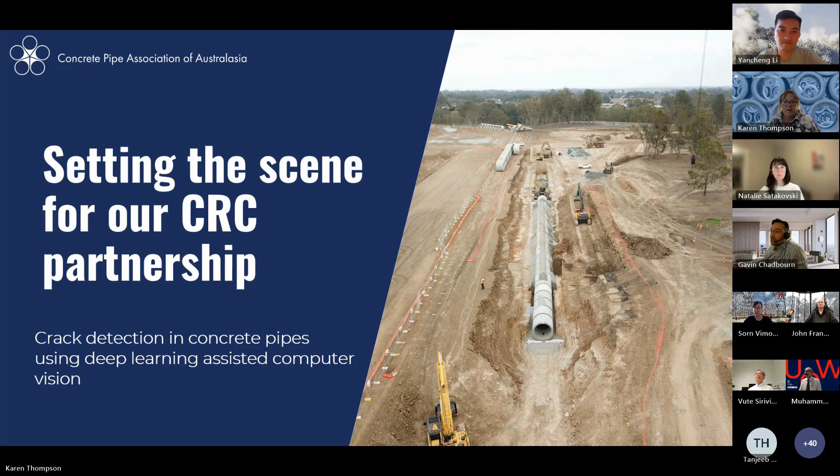So I guess what the challenge is, is that currently the industry relies very heavily on CCTV for the inspection of newly installed concrete drainage pipes and routine maintenance inspections as well. It's very widely used and it underpins most condition assessments. But the reality is the technology has a key limitation. It simply doesn't have the resolution needed to accurately measure fine cracks, particularly anything below 1 millimetre. And I'll explain to you soon why that matters.

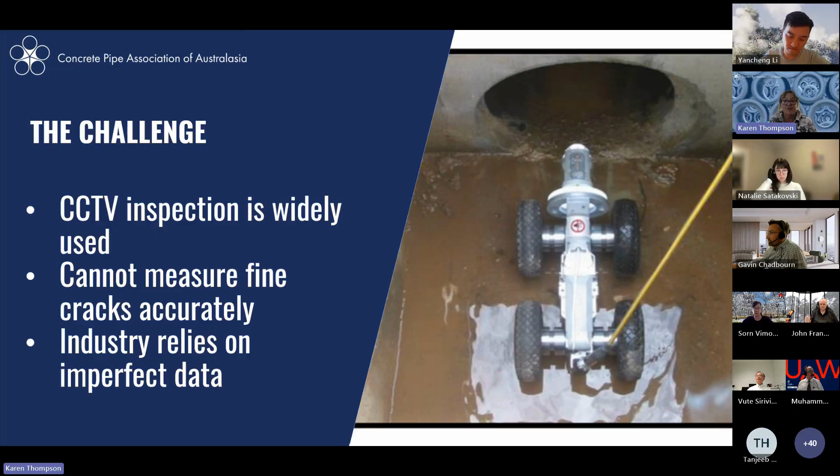CCTV operators identify defects such as cracks, and they estimate the crack width based on experience or past entries into software. Repair, maintenance and replacement decisions are made on this somewhat imperfect data. We're relying on a tool that isn't designed for the level of precision that is actually being reported. The consequence of the limitation is that the crack widths tend to be overestimated in practice.

The reporting can lead directly to decisions to line, repair, or even replace pipes that are still structurally sound and perfectly capable of performing as intended. From an installer's and an asset owner's perspective, this translates into unnecessary expenditure, disruption, and inefficient allocation of finances. It just isn't a technical issue, it has real financial and operational implications across the industry.

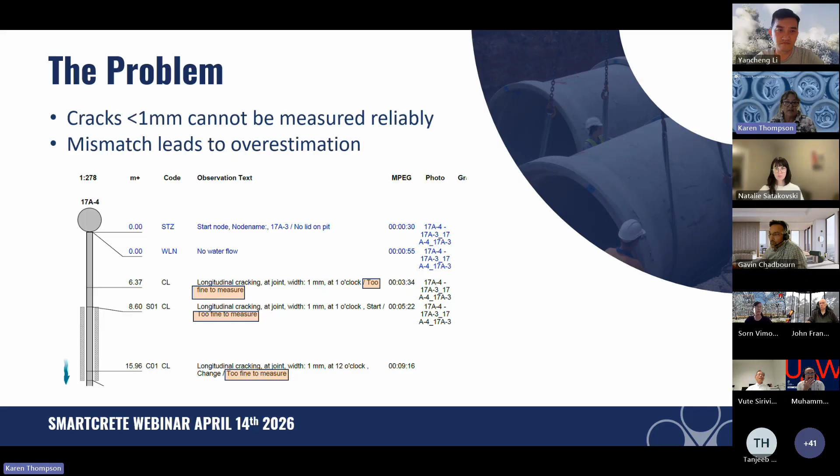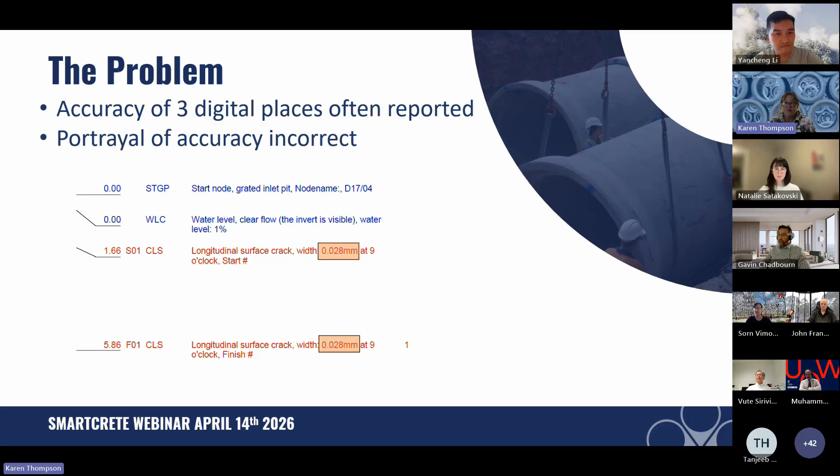Despite the lack of technical capability for CCTV cameras to measure crack width accurately below 1 millimetre, there's many incidences of CCTV reports stating crack width measurement down to the 3rd decimal place. Reporting cracks with widths to this accuracy portrays a level of accuracy for what is essentially an estimation of a crack width. A level of accuracy to 1,000th of a millimetre is simply not possible with current camera technology. Yet installation contractors are forced to either undertake remediation or spend time and money to undertake further analysis of such reported defects based on this misleading reporting.

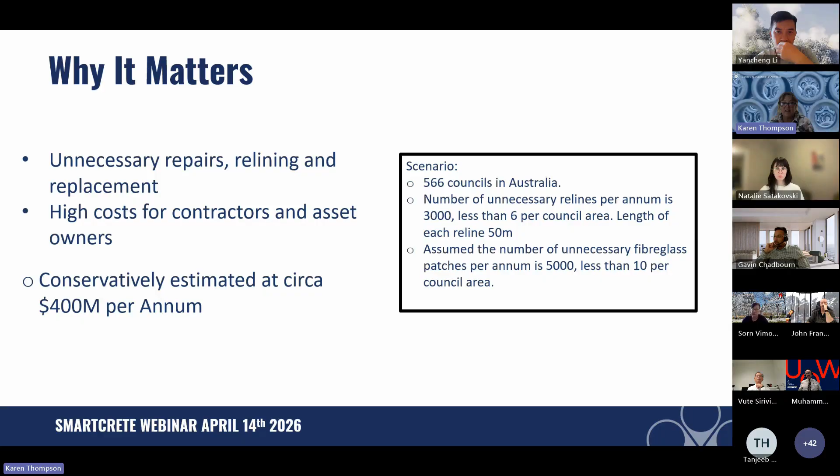I guess I've got to build the scenario of why it matters. It's a really high cost, and we estimate it conservatively to be around $400 million per year, based on building a scenario where there's 566 council areas in Australia, and we assume each council area on average has a number of relines and fiberglass patches done in localised sections of pipe.

So there's a lot at stake. We also have a gap in our standards.

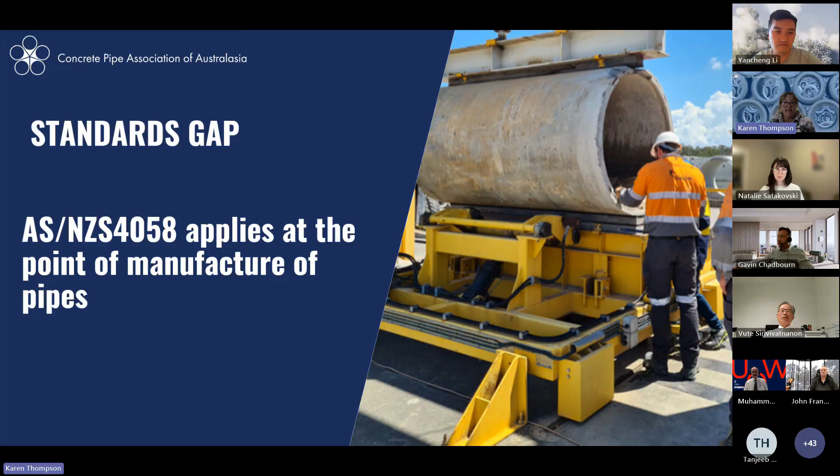The crack width nominated is simply a quality assurance performance indicator. It's not intended to be the maximum allowable crack width in the field, but it often gets adopted as such. The allowable crack width varies with increasing cover to steel. CCTV reports do not correlate cover to steel, nor do they include the design cover for the pipe, so what's normally assumed is that the lowest crack width applies to every pipe.

If the cover to steel is 20 mils, the 0.2 mil feeler gauge is used, and the tip must not penetrate a crack more than 3 mils deep. That's how we measure it.

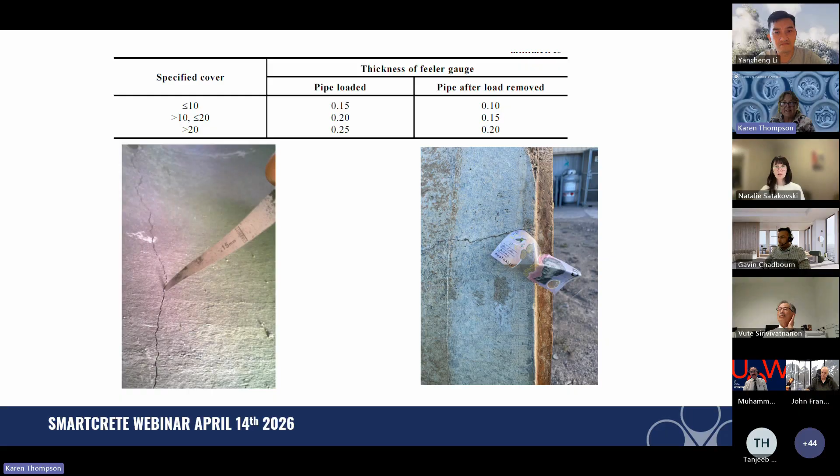Just to give you a sense of allowable crack width, a $5 note is, don't quote me, I think 0.126 millimetres, so less than 0.15. When we were doing some factory testing of old exhumed pipes, I tried to stick a $5 note into a crack and could only just get it in there, and this pipe was ultimately load tested.

But it gives you a sense of the size of allowable cracks. We're all familiar with hairline cracks—they're visible but not measurable. They're expected in all proof load tested concrete drainage pipes, and also expected in all installed concrete drainage pipes where the applied load approaches pipe design load.

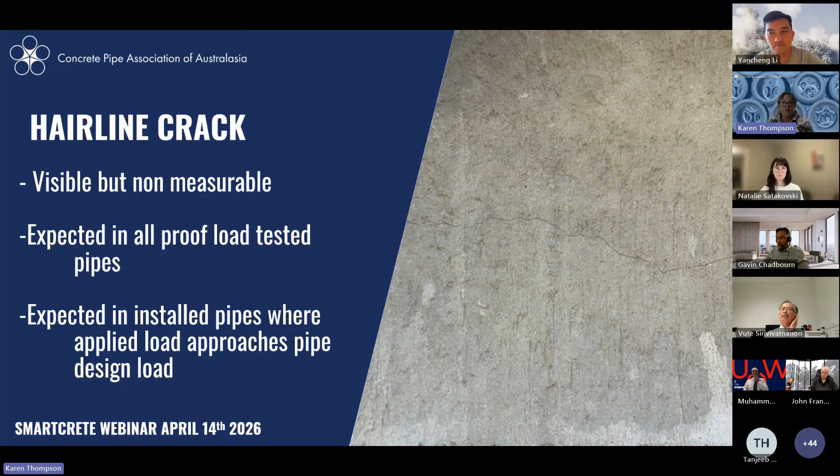There are specifications that do not allow the existence of hairline cracks in installed concrete pipe. They have a no-crack policy, which just doesn't make sense with a steel reinforced concrete structure. But these specifications make no steps to ensure that loads applied are less than what would see the steel doing its work and hairline cracking occurring.

So I think I'm trying to paint a little bit of a problem our industry has. The other thing is crack assessment can differ.

Crack assessment varies by the operator and what the operator sees, the camera that's utilised, the equipment, the distance the camera ends up being from the wall of the pipe, the level of zoom applied with the camera, and even cleaning—the spec says they have to clean the pipeline through pressure cleaning, the walls become very, very wet, and so every little hairline crack looks like a canyon.

You can see from these pictures, this is the same image, just with 3 different zooms. If you saw the top image, you'd say maybe there's this very, very small hairline crack. When you get down to the zoom on the bottom right, that looks like a disaster, and it would be pulled out. But the reality is the pipe has a very acceptable crack width. And that's just one of the issues we get from the CCTV reports.

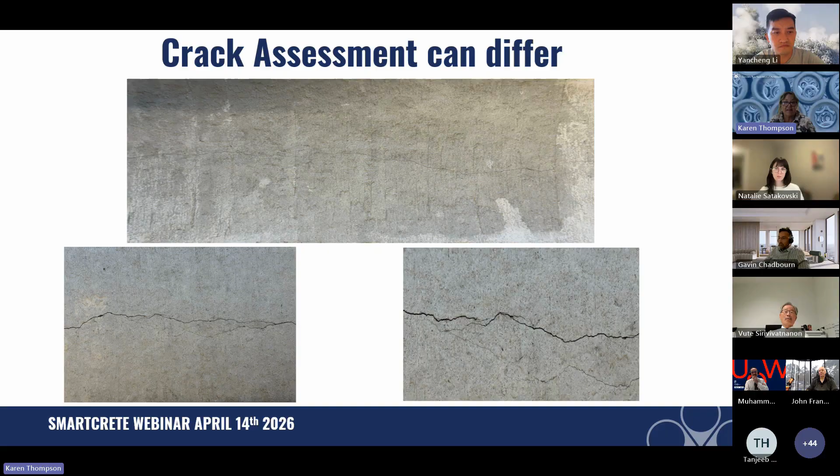So what we're hoping for is accurate field crack measurement being possible—that's our dream. And that's where Yancheng and his team at UTS offered up the idea that deep learning assisted computer vision could be a game-changing alternative to current CCTV monitoring of installed pipes.

Asset owners also need to have an improved understanding of the mechanism of cracking in concrete pipes. The crack initiation and propagation needs to be better understood, and how it differs from ordinary concrete due to the low water cement ratios in the product, the level of compaction utilised in the manufacturing process, and the very small diameter of steel incorporated compared to normal steel reinforced structures.

And the effect the pipe shape has on crack propagation, and the importance the underground environment has on the corrosion process. Not all cracks are what they're cracked up to be. So in steps Arnaud Castel and his research team at UTS, who are undeniably capable of researching the issue and providing data to better specify allowable performance in given environments.

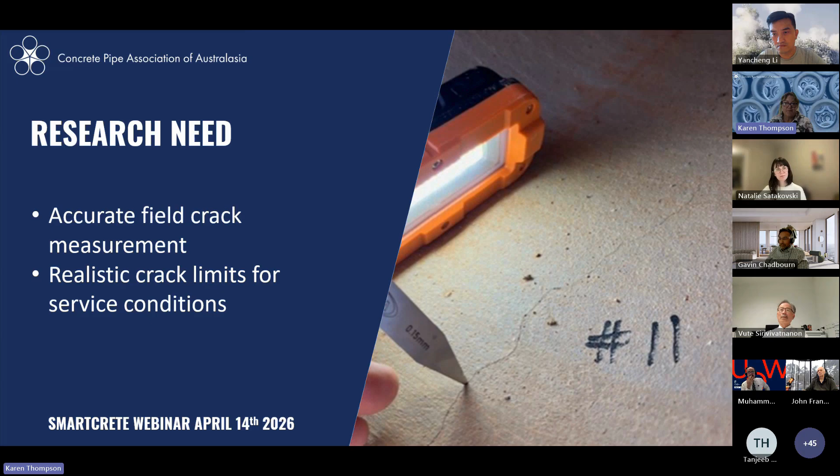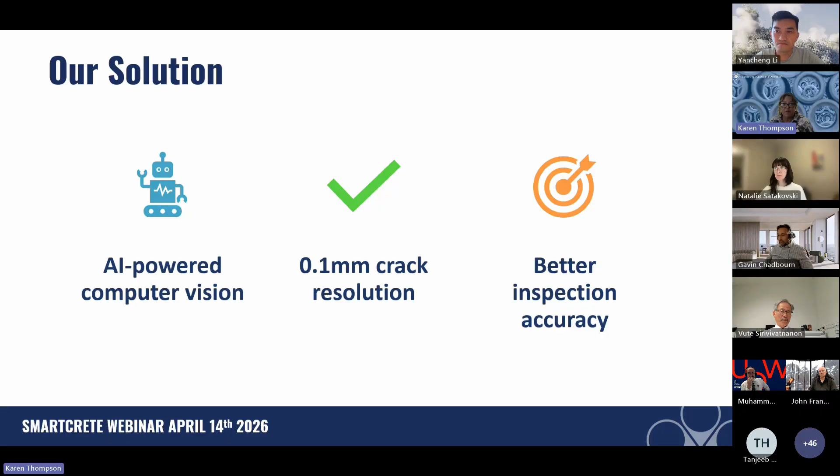So stream 1 of the research project is to develop a deep learning assisted computer vision as an alternative to current CCTV monitoring of recently installed and in-service pipes. The technology will be able to achieve 0.1 millimetre accuracy. We're not looking for that 1,000th of a millimetre that is currently reported, because that's not possible, but 0.1 will actually do the job immensely better. The development and commercialisation of equipment, process and inspection guidelines related to this new technology would provide the asset owner with appropriate data to make improved, informed assessments and reduce unnecessary costs in construction.

And then comes in the supporting research. Autogenous healing is an important phenomenon in installed concrete pipe. Autogenous concrete self-healing reduces the crack width or can totally seal the crack if the crack width is small enough. This project is investigating the relationship between crack width, self-healing process, and the corrosion of reinforcement of concrete pipes.

Other supporting research it's covering is that the corrosion behaviour of steel in concrete pipes is unique. It suggests that corrosion products forming quickly at the crack tip create a barrier at the steel surface, limiting access for oxygen and humidity to the sound steel. As a result, active steel corrosion stops. In this case, oxides formation does not lead to any additional concrete cracking, as there is enough room for the rust expansion within the crack.

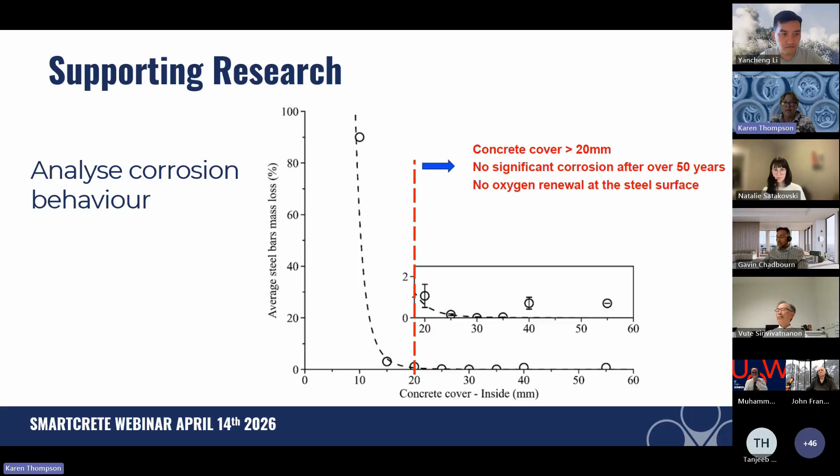Moreover, the loss of mass required to heal the crack tip is marginal. As a result, the early corrosion does not affect the service life of the structure. Research on exhumed concrete pipes in the past has showed that there was no significant corrosion after 50 years in service. This project seeks to further consolidate on the past research by investigating the corrosion of reinforcement in concrete pipes in aggressive environments that stormwater pipes may be subject to.

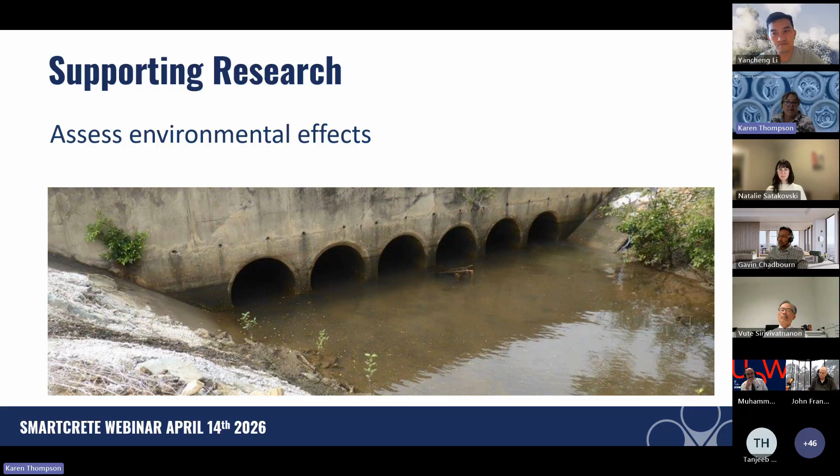And assessing the environmental, like where the pipe is. Pipes are buried structures, and so it's in a completely different environment underground to most concrete structures. And so the environment that the pipes are in is important.

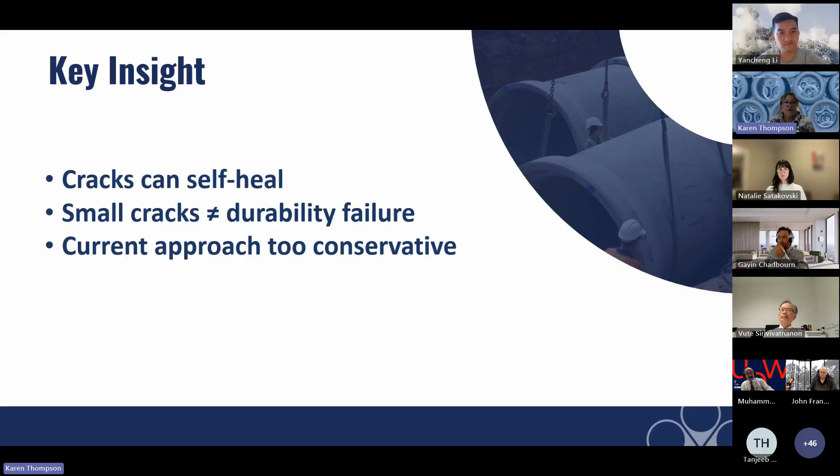So our key insights that we're trying to uncover is that cracks can self-heal and will communicate how and when. Small cracks do not equal a durability failure, and we want that to be clear. And we want to also just show the research to show that the current approach can somewhat be too conservative for concrete pipes. The research outcomes are going to have great industry impact.

Firstly, by improving the quantification of cracks and when they are actionable defects, will reduce the instance of unnecessary repair. The useful life of concrete pipes is a value that determines depreciation expense of asset owners. This research can show how CCTV inspection data can be used to increase the useful life using the knowledge of cracks healing and not propagating as real justification. The ability to measure, not pretend to measure, or errantly estimate crack width will underpin improved decision making.

So our outcomes are going to be a new inspection technology, the new improved updated standards that provide asset owners with more confidence in the performance of the product, and cost savings from not replacing or repairing unnecessarily. That's it. Thank you. Over to Yancheng to tell you the whole technical details.

Thank you, Karen. I think that was a very good overview of the challenges that you have with accurately and reliably measuring cracks, but more importantly, how do you interpret what those cracks mean in terms of corrosion risk. So our next speaker is Yancheng Li. He is a researcher at the School of Civil and Environmental Engineering at UTS. His research focuses on applying computer vision, deep learning, robotics, and large language and vision language models to improve the inspection, monitoring, maintenance, and decision-making of concrete infrastructure. His work aims to bridge advanced AI techniques with practical engineering applications to enable more efficient and reliable infrastructure management. Dr. Li is widely published and has over 170 journal and conference papers to his name.

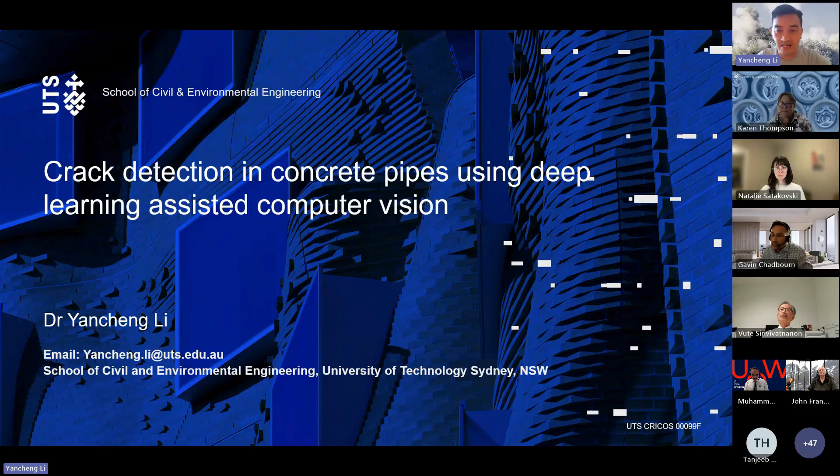Over to you, Yancheng. Thank you, Gavin. Thank you, Karen, for laying out very clear, background information on why this research is very necessary. So I'm probably gonna skip some introduction slides, but let me start going. So first, of course, as Karen mentioned, this is a part of the SmartCrete CRC project. We are just 1 year into the project, so have made some progress over here.

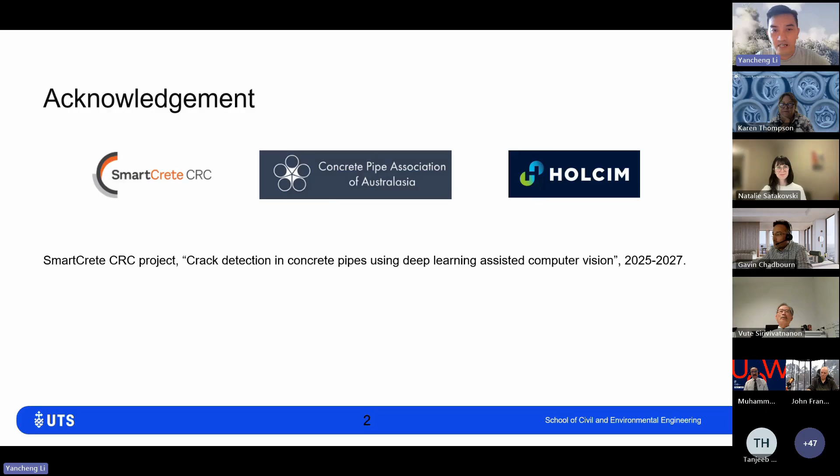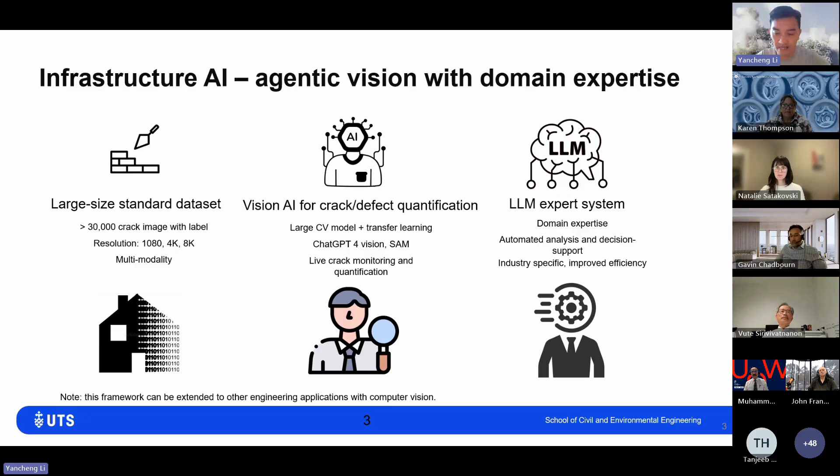Before formally going to the slides, we'll briefly introduce our team, which uses AI, computer vision, and agentic vision for concrete defect detection, quantification, and evaluation. We also use large language models to offer professional advice for following assessment and decision making. That's our research team.

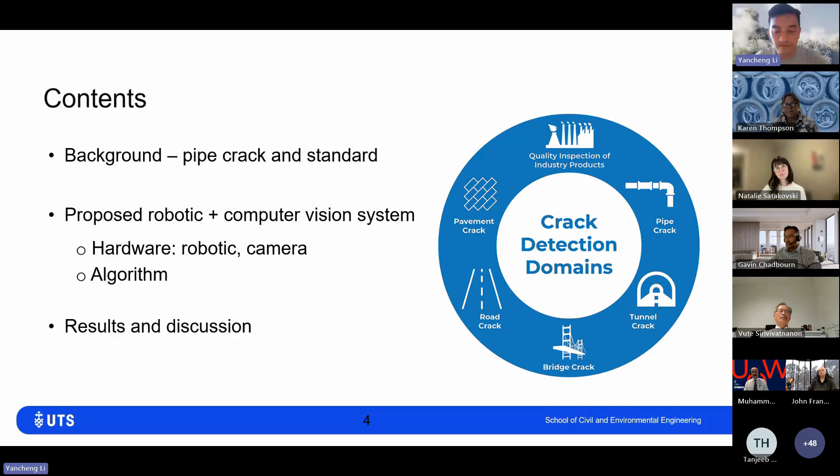For content, I'm going to skip some background introduction and dive straight to the key technology we have, which is deep learning computer vision for pipeline crack and pipe crack assessment.

Since we are only one year into the project, our main focus is still in the quality assurance process, during testing. In this practice, what people do is, as Karen mentioned, insert a feeler gauge into the crack to see how much it is, and based on personal and professional experience, evaluate the pipe. The thing is, the crack is probably going to go through the pipe longitudinally, for 2.4 meters or 3 meters, so it's not that easy to evaluate the entire crack using human eyes.

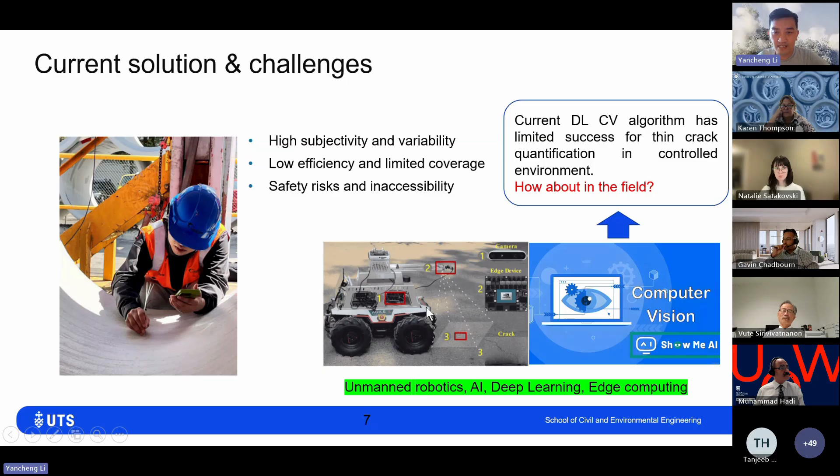Then, talking about current computer vision with deep learning, you all know there's lots of research already published using deep learning for crack detection and quantification. But the key challenge here is that for cracks, as Karen mentioned, there's a need to detect very thin cracks, to quantify down to 0.1 millimeters, which is very challenging. There are limited success reports for thin crack quantification in controlled environments, but we are doing this in the field. That's why we propose this new approach with robotics, edge computing, and computer vision, to see if this is going to work.

This is the main framework of our algorithm. We're using a multimodality framework for high precision pipe crack detection and quantification. In terms of multimodality, we use two inputs: the first, as is normal for deep learning crack detection, is RGB data, which is the image we normally have with our phone or camera.

The other modality is the depth information, which refers to the depth from the camera to the concrete surface. This produces a similar image to the RGB image, but each pixel represents the distance from the camera to the concrete surface, giving you a pixel-level map of the depth.

The reason we introduced this is that for crack detection, it's normally easy using an RGB image, but your output measurement is crack length and crack width in pixels. We have to convert this pixel measurement into a physical measurement. Typically, people put a reference object beside the crack, but this isn't doable if you want to do it very quickly. So introducing this depth map removes the need for a reference object on site.

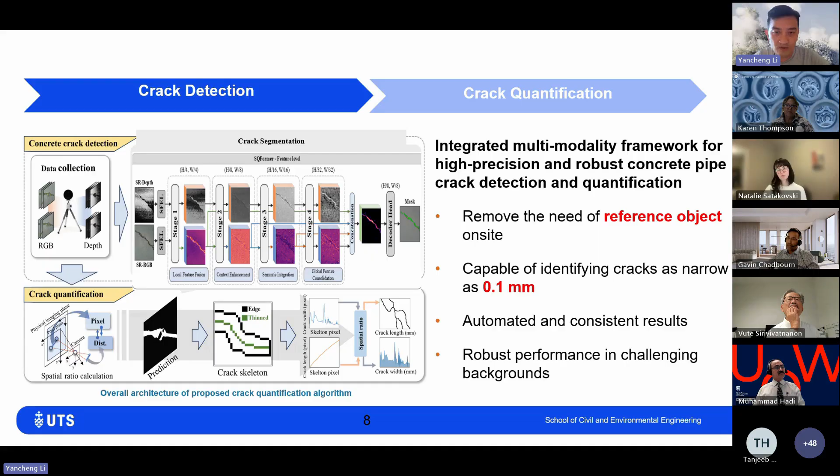For data collection, we use the RealSense from Intel, an RGBD camera. This camera collects images giving you two types of files: the first RGB, the second depth. So you have all these images together.

We also bought a robot, which we modified by installing an RGBD camera in the front. So we collect data with this camera, pull the data out to our laptop, and measure and process the images we have. Worth noting here is this is still post-processing, but I'm going to show you very soon that we are developing real-time assessment as well.

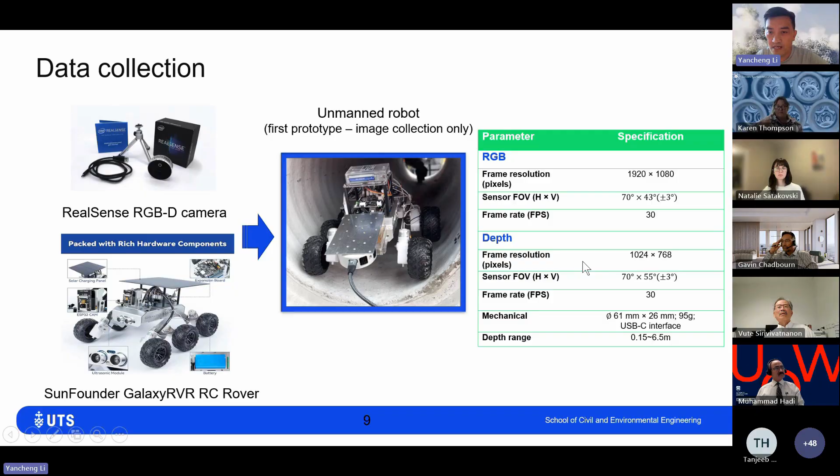So the overall framework here is we basically use two pipelines, the depth image and the RGB image. We go into different stages of feature extraction, and feature fusion, trying to combine them together.

The thing here is why we use depth maps. The depth map, as mentioned before, first provides reference for quantification. So we need something, the distance from the camera to the crack surface, as the reference measurement for quantification.

Second, we're going to remove the background noise, because for many pipe cracks you have water stains, you have many things, sometimes some plants. Based on the depth feature, you can observe the feature change, for example a sudden depth increase which indicates there may be some crack happening. So you're able to remove all the other image noise or disturbance, to make the measurements more accurate.

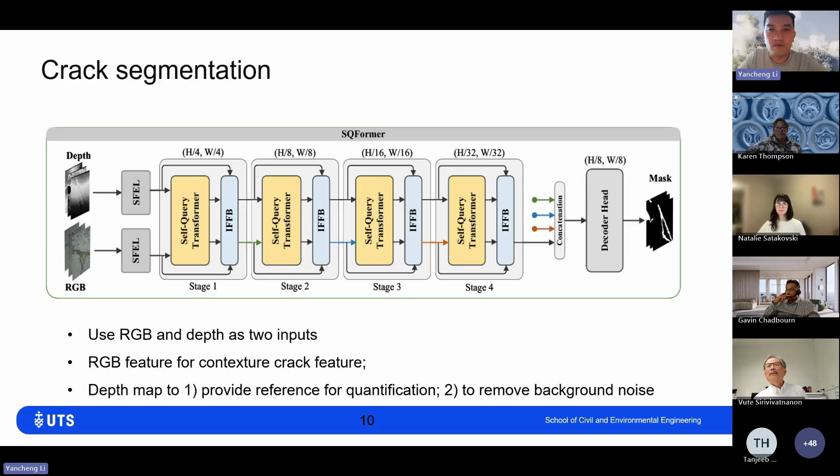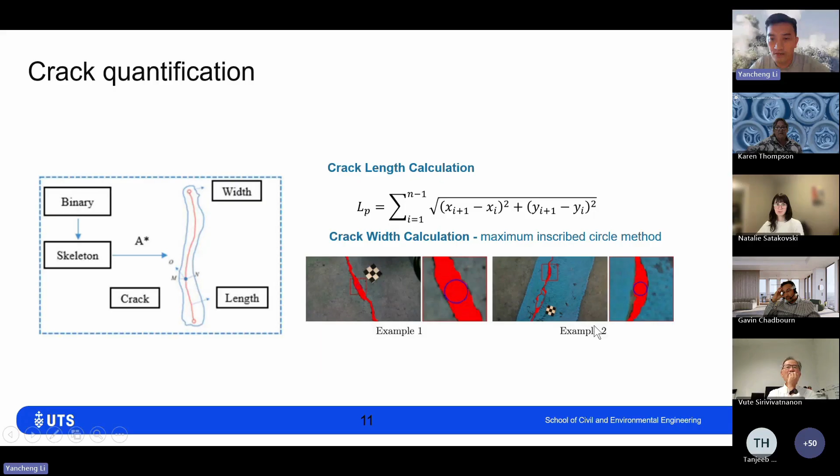So this is the process for crack quantification. We're able to first make the skeleton of the crack, the middle line here. Then based on this skeleton, we can measure the crack length and crack width. We're using the small circle, inscribed circle method, to measure the crack width here.

So we tested over 15 types of pipes with different diameters, and collected over 4,000 image pairs of concrete pipe on site. For algorithm validation, we did two steps. First is zero shot, because we also did other research on other types of concrete defects, typically wider cracks, not as thin as 0.1 or 0.15 or 0.3, probably in terms of millimeter level.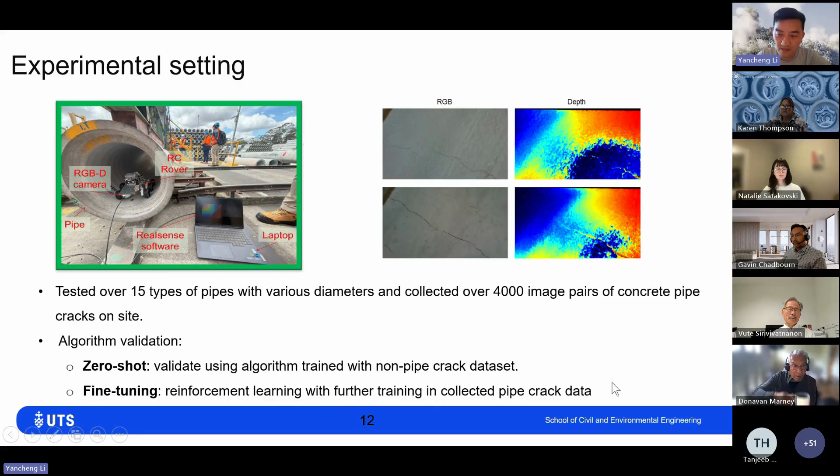So this is the result we have. This is the RGB image, this is the depth image. This is a typical pipe, you have some painting that says what type of pipe it is, whether it's qualified or not. So this is concrete with an uneven surface, with some surface texture, which creates disturbance for the depth image. We also have another type of very thin crack here.

For our zero shot, we're able to somehow get a good result, but you can see the color difference on the label on the crack. The green one is true positive, meaning if all the cracks are green like this one, it's perfect. So we have false negatives. The thing you don't really want is false positive. As you can see from the zero shot, we have a certain level of success in quantifying and labeling the crack, but maybe it's a bit over-exaggerating the crack width here, so this is not something we want.

So we fine-tuned the algorithm. We're able to really nail down the crack length. I'll show you the stats very soon.

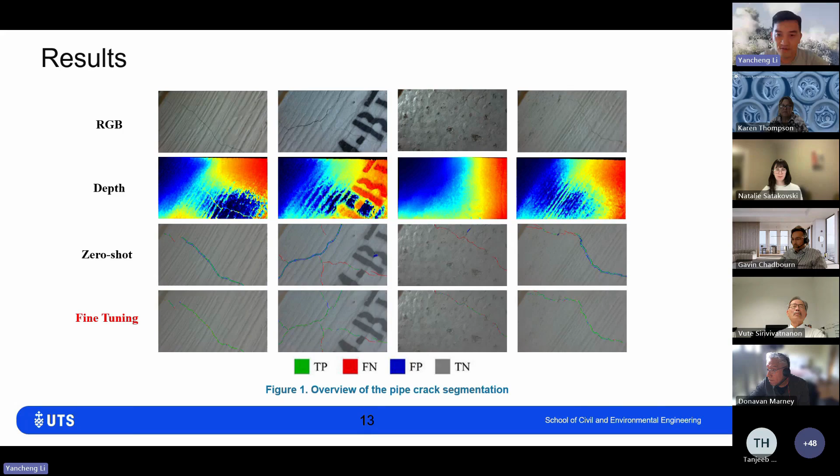We also selected different scenarios. We intentionally put some plantation, some grass, to create disturbance. We also put some water somewhere, though I don't think we show the water mark here. But you can see from all these scenarios, we are able to detect the crack quite successfully. Sorry, because it's a very thin crack, you can't really see much, but I'll give you some data you can see very clearly.

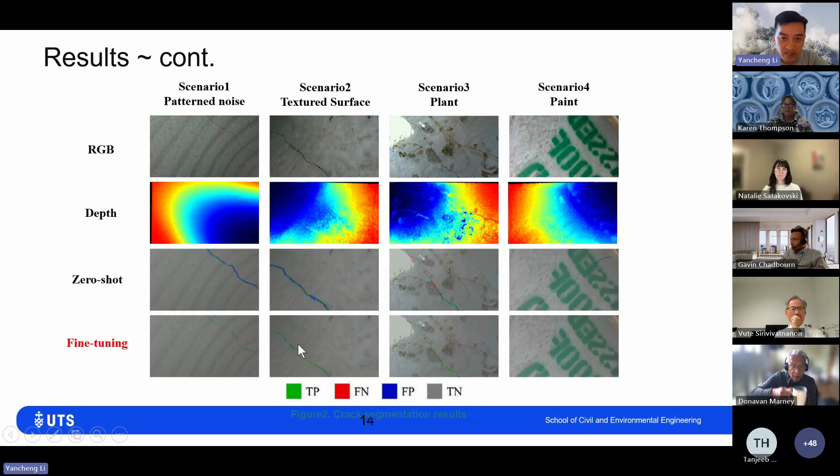So evaluation metrics, we have 4 metrics to investigate whether this algorithm is working fine. Higher value means better, and the highest value is 100. For all those parameters, we have improved significantly from zero shot to after fine tuning. The important one is MIoU, which indicates identification on the pixel level of the crack, at 85, which is very good so far.

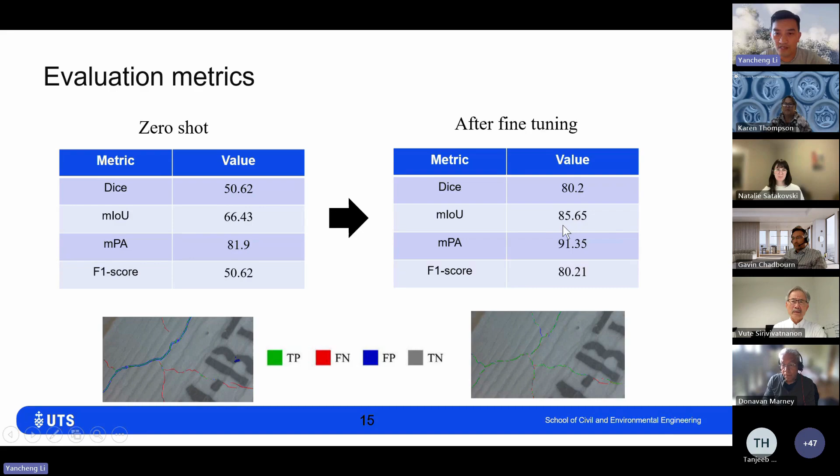We also compare with each individual crack. Here we have the ground truth, the dashed line, which is the real depth and width of the crack along its length over time. The 'pred old' means the zero shot prediction. You can see there's quite a variation from the ground truth, but the fine-tuning result is very close in matching it. This pattern appears across all scenarios, so we can confidently say our result has been very good. Now I'll show you quantitatively how good it is.

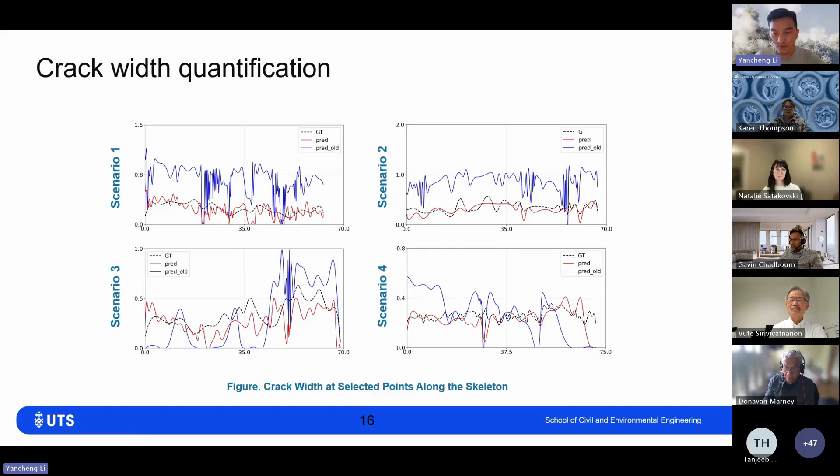A very important parameter is 0.1, as mentioned by Karen. We are able to detect this very fine crack with our algorithm.

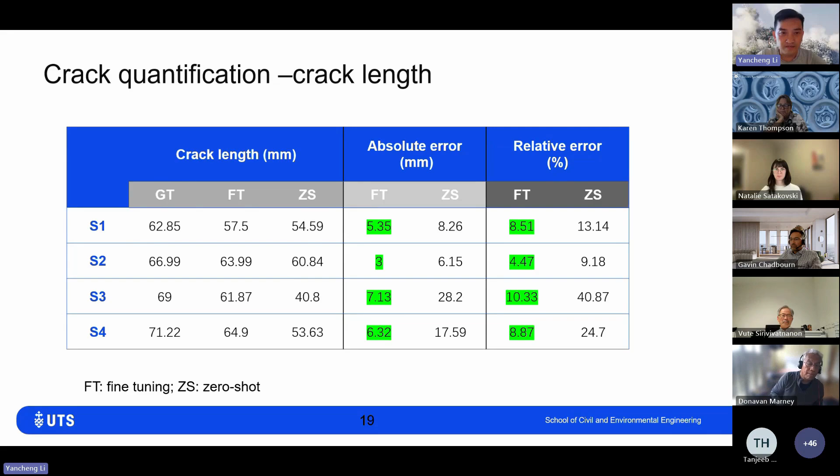I'll also show you - remember in the previous slides we used robots only to collect images, we weren't able to process in real time online. But now we have new development with edge computing.

We have the robot here, a few of them. We install an RGB camera, not that high quality - we can upgrade to a very high quality RGB camera. We also have the system controlling the robot, going forward and backwards, and this onboard chip, a Raspberry Pi, to run the algorithm.

This simple demo is initial development, not that accurate yet, but it shows the potential of our system. You can run the robot through the concrete sample, and the green text shows you the result right away - telling you the length, the crack width, average width, etc. Once you scan through an object, such as pipes or concrete structures, you can have the result analyzed and stored somewhere for later decision making. That's something we did for this.

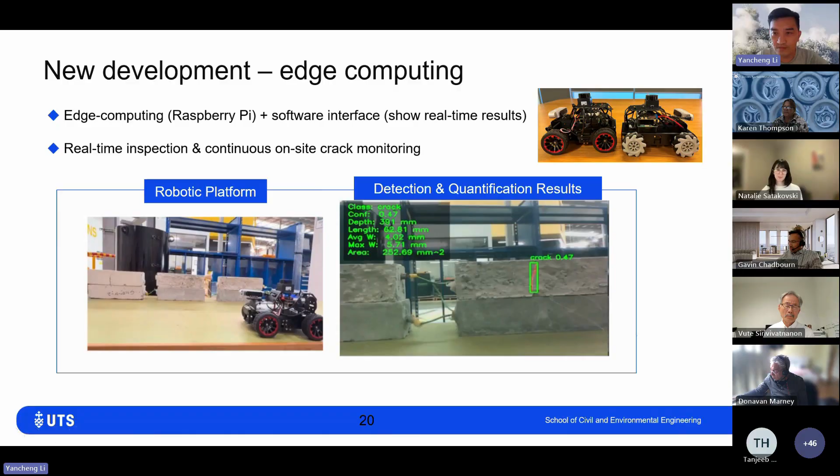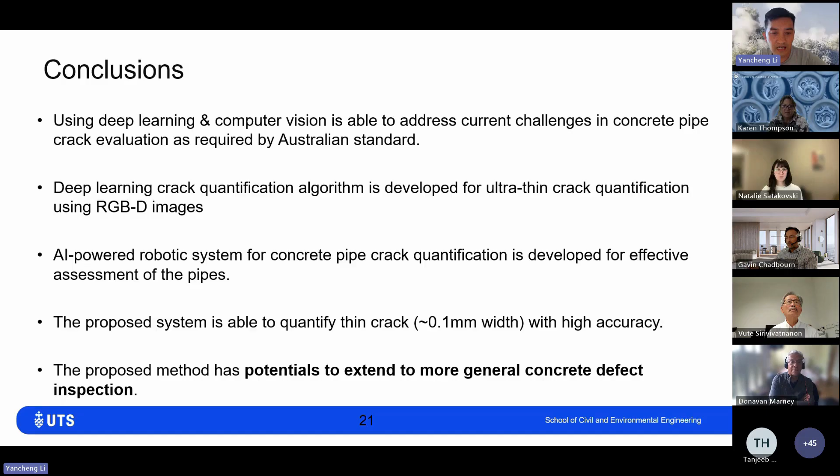In conclusion, we used an RGB-D camera and multimodal deep learning algorithms to quantify ultra-thin cracks in a pipe, with an AI-powered robotic system for concrete pipe crack quantification. This system can quantify thin cracks, roughly 0.1 or even lower, with high accuracy. Worth noting, we have the potential to extend into other types of concrete defects - we're working on this as well, including corrosion, discoloration, and spalling, etc. We will also be able to do it.

Other ongoing work: we're using a large language framework to capitalize on crack quantification for further risk analysis and structural assessment, because measurement alone is only the starting point - we need to know the reliability of the structure. We also have a multi-agent system to streamline crack quantification with maintenance scheduling, and we're developing deployable edge computing agentic vision for real-time assessment, integrated with professional advice and domain expertise for the decision-making process.